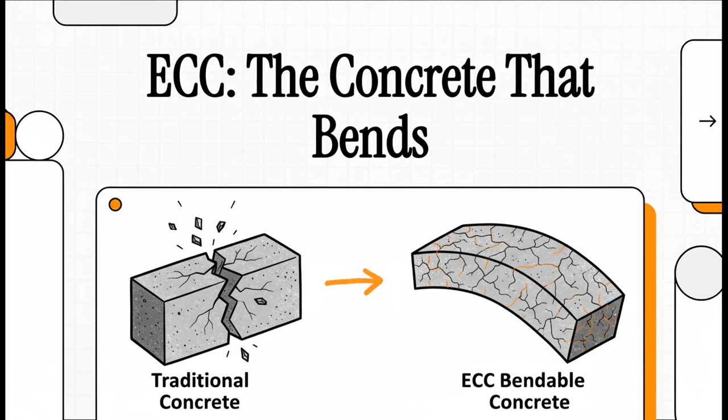For as long as we've built things, we've known one thing about concrete. It's strong, it's rigid, and it doesn't bend. But what if I told you that its greatest strength, that rigidity, is also its fatal flaw? Well, today, we're diving into a material that flips that entire idea on its head. A concrete that's been engineered right down to the molecular level to do something that sounds impossible, to bend without breaking. And this gets to the heart of a really big question in civil engineering.

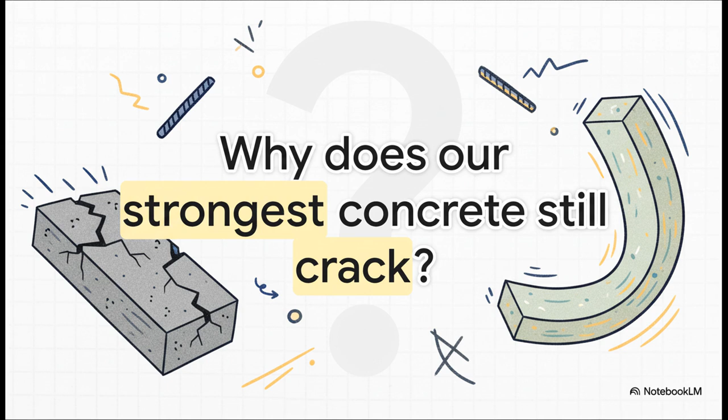I mean, think about it. For over a century, we've been on this relentless quest to make concrete stronger and stronger. So why is it that our bridges, our roads, our buildings, they all still seem to crack way too soon? What have we been missing? All right, to really get to the bottom of this, we've got to look at how we got here. The story of concrete is pretty fascinating. It's this constant push and pull where every time we solved one problem, we kind of accidentally created a new one. So let's take a quick look back.

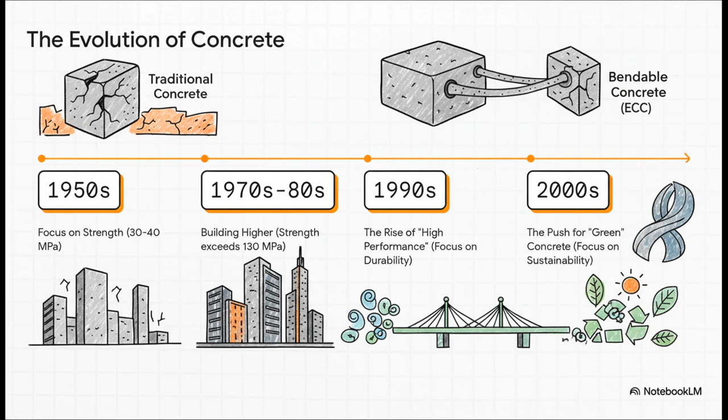In the 50s, a basic 30 or 40 megapascal concrete was plenty strong. But then, fast forward to the 70s and 80s, we're in this race to build higher and higher, and suddenly we're pushing past 130 megapascals. But then a funny thing happened in the 90s. We realized all these super strong structures were still falling apart. So the focus shifted to durability. And more recently, of course, it's all about sustainability. Every step made sense at the time, but it was leading us somewhere unexpected.

And this is where it gets really interesting. Researchers Mehta and Burrows pointed out this massive paradox. It turns out the more we jacked up the early strength of concrete, the less durable it often became in the long run. It's a total catch-22, right? The very thing we were doing to make our structures last was actually making them fail faster. So what gives? What is this hidden flaw that's been tripping us up for so long? Well, the answer is a fundamental imbalance that's literally baked into the nature of concrete itself.

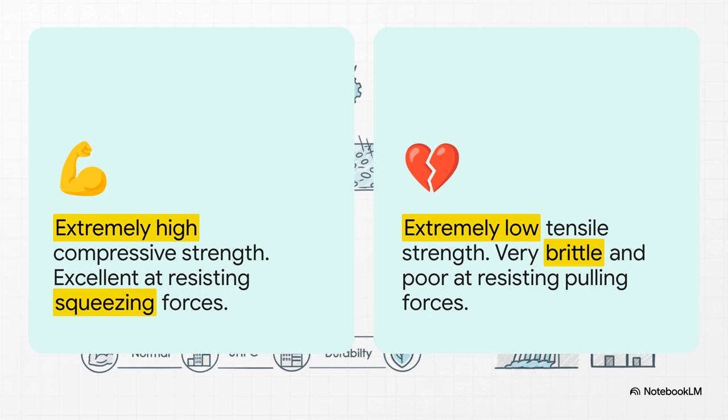Okay, this slide right here, this is the whole story. As engineers, we obsess over compressive strength, how well concrete resists being squashed. And it's amazing at that. But try to pull it apart, even a tiny bit, it's terrible. And guess what causes most real-world failures? Shrinkage, thermal stress, seismic events. They're all failures in tension. We've been focusing on the wrong thing, ignoring its Achilles heel.

And that brittleness, that tendency to just snap, is the ultimate bottleneck. It's what holds us back from building truly resilient infrastructure. It compromises durability, and let's be honest, it kills sustainability because brittle things need to be repaired and replaced all the time. But what if we could just change the rules? What if instead of chasing strength, we started chasing toughness? What if we could tackle that tensile weakness head-on by redesigning concrete from the inside out? Well, that exact line of thinking led to a whole new class of material.

And here it is, meet engineered cementitious composites, or ECC. And that first word is the most important one, engineered. This isn't just a new recipe. It's a material designed with micromechanics, where every component, the fibers, the matrix, the bond between them, is fine-tuned for one specific goal, ductility. It's designed to behave less like a brittle ceramic plate and more like a ductile piece of metal.

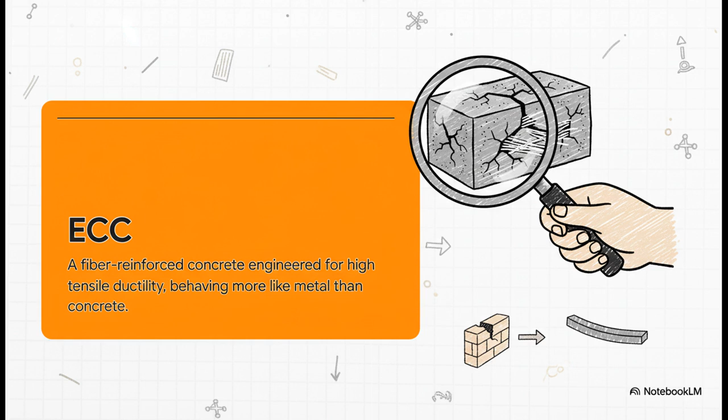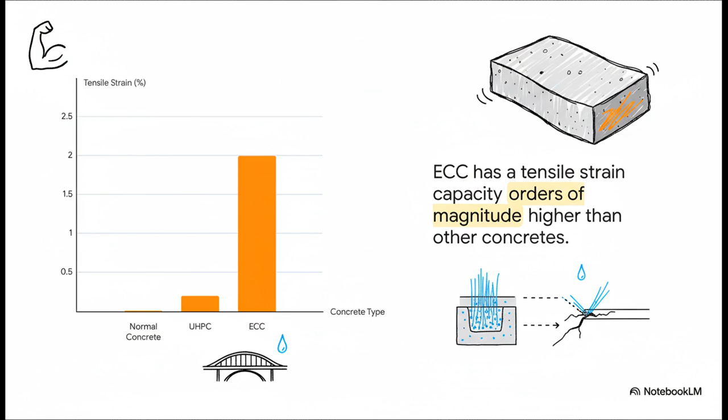Now, if you're a numbers person, this chart says it all. We're looking at tensile strain capacity, basically how much a material can stretch before it snaps. Normal concrete, it's that tiny little sliver at 0.01%. Even fancy ultra-high-performance concrete, UHPC, only gets to about 0.2%. And then you have ECC, way out in a league of its own, at over 2%. Yeah, you're seeing that right. That is over 200 times the ductility of the concrete we use every day. 200 times more give before it fails. This isn't just a small improvement, this is a complete paradigm shift in material science. It's a game changer.

So how does it pull this off? What's the secret? Well, when you overload regular concrete, one big crack forms and it's game over. ECC is way smarter. It's designed to spread that stress out, forming a network of thousands of tiny, controlled microcracks. The fibers inside bridge these cracks, allowing the material to actually get stronger after it starts cracking. It fails gracefully instead of catastrophically.

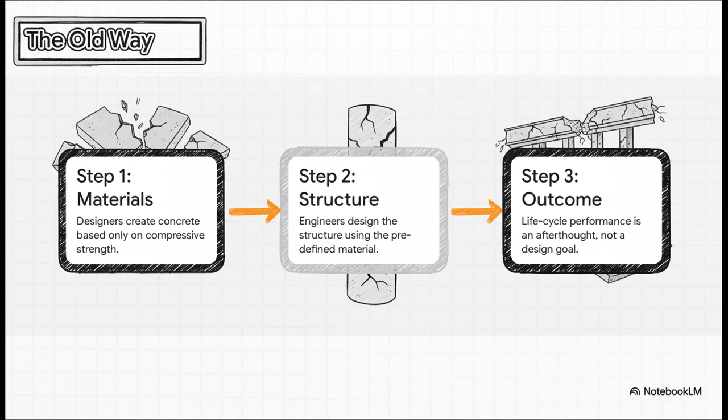Okay, so when you have a material that is this different, you can't just drop it into the old way of doing things. It doesn't just allow for a new design philosophy, it demands one. For decades, the process has been completely disconnected. It's like an assembly line where the departments don't talk. The materials people cook up a concrete mix based on a strength number. They hand it off to the structural engineers, and everyone just kind of crosses their fingers and hopes it lasts. Its actual performance over time is just an afterthought.

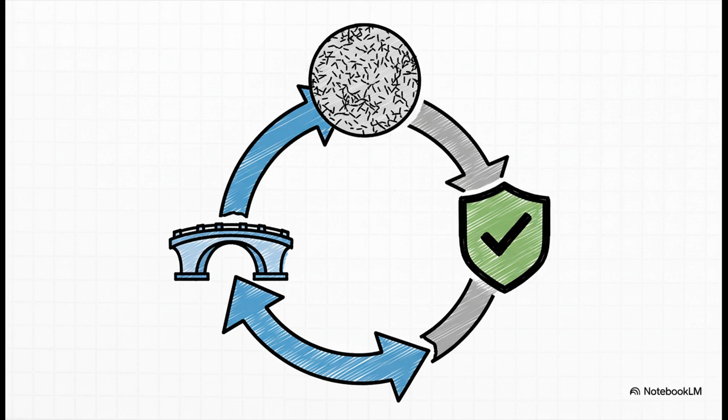ECC lets us smash those silos. It opens the door for a truly holistic approach called ISMD, Integrated Structures and Materials Design. And it's all about creating a conversation between the material, the structure, and what we actually want it to do in the real world. And this feedback loop is just brilliant.

Instead of starting with the material, you start with the end goal. You say, I want a bridge deck that lasts 100 years. And then you work backwards. That goal tells you the structural behavior you need, which tells you the material properties you need, like high ductility. And with ECC, you can actually go back and engineer the material's microstructure to deliver exactly that. You're connecting the nanoscale to the megastructure. It's a complete flip of the script.

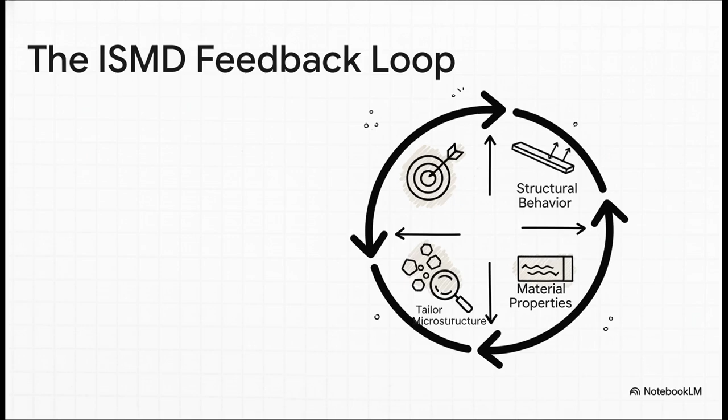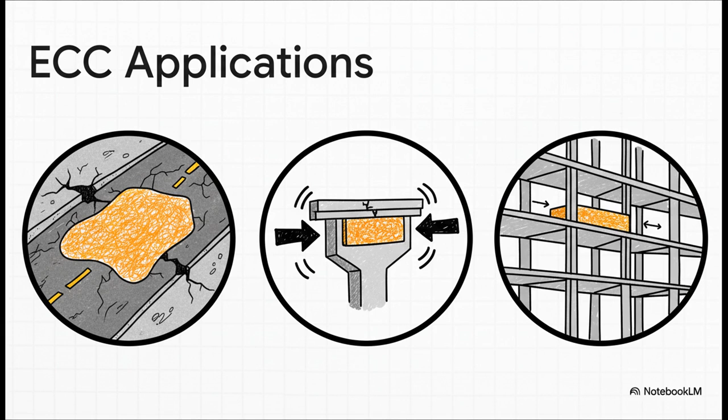Now, this all sounds great in theory, but is it just a cool lab experiment? Absolutely not. ISMD and ECC are already out there in the real world, solving some of our most difficult infrastructure problems. We're seeing it used for all kinds of things. Think about highway patches that don't fall apart after one winter, or expansion joints on bridges that can actually flex with temperature changes without failing. In earthquake-prone areas, it's being used in high-rises to build beams that can absorb seismic energy. It's proving itself everywhere, from simple repairs to brand-new cutting-edge construction.

So the big takeaway is this. The greatest innovations can come from identifying a material's most fundamental weakness and completely re-engineering it from the ground up. The journey to bendable concrete is incredible, and it leaves us with a really provocative question. If we can teach our oldest, most stubborn building material this amazing new trick, what other materials are just waiting for their own redesign?